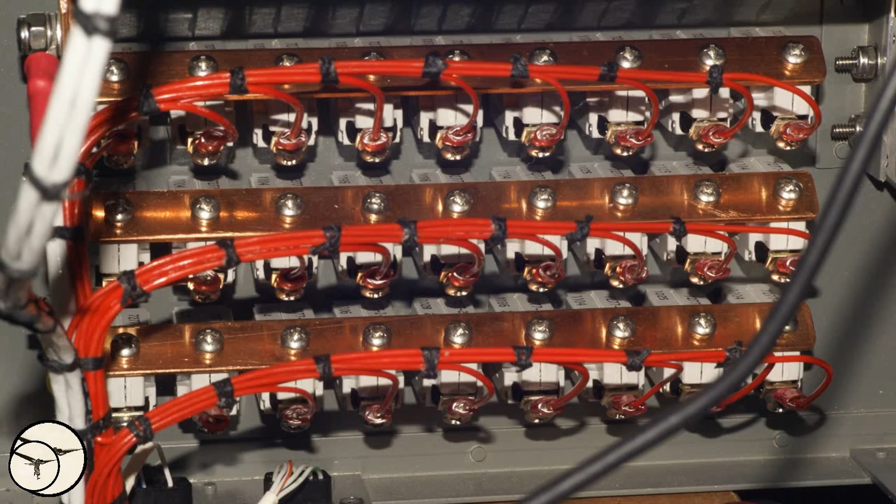The ATR features a sophisticated electrical system designed with multiple buses and alternate power sources to ensure redundancy and reliability for critical systems on board. A bus is a metal bar used to distribute electrical power to multiple systems.

At the core of the system are 6 key buses powered by 2 onboard batteries. The hot emergency battery bus, hot main battery bus, DC essential bus, DC emergency bus, DC standby bus, and via an inverter, the AC standby bus. These buses support the aircraft's most vital functions in the event both generators fail.

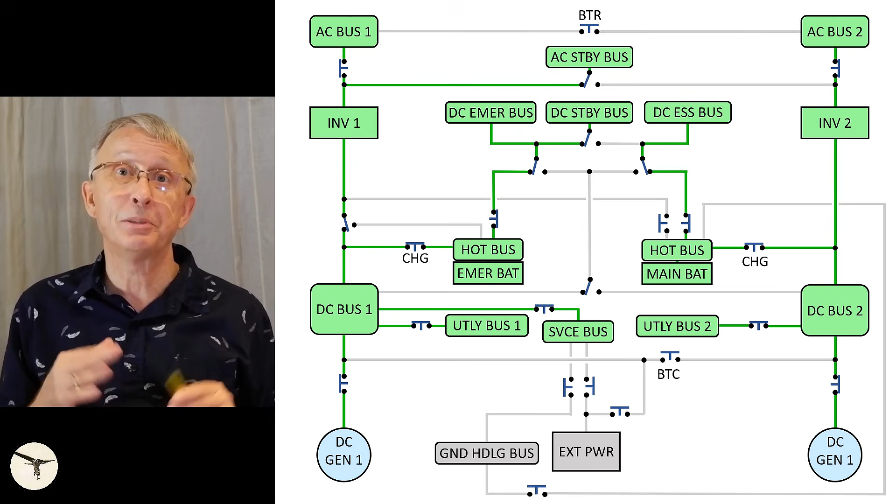The 2 DC generators not only keep the batteries charged, but also supply power to 2 primary buses, DC bus 1 and DC bus 2, which handle general electrical loads and various service functions. In addition, 2 inverters convert DC to AC power, supplying 3 AC buses with constant frequency power for systems that require alternating current. Here are some relevant systems powered by those buses.

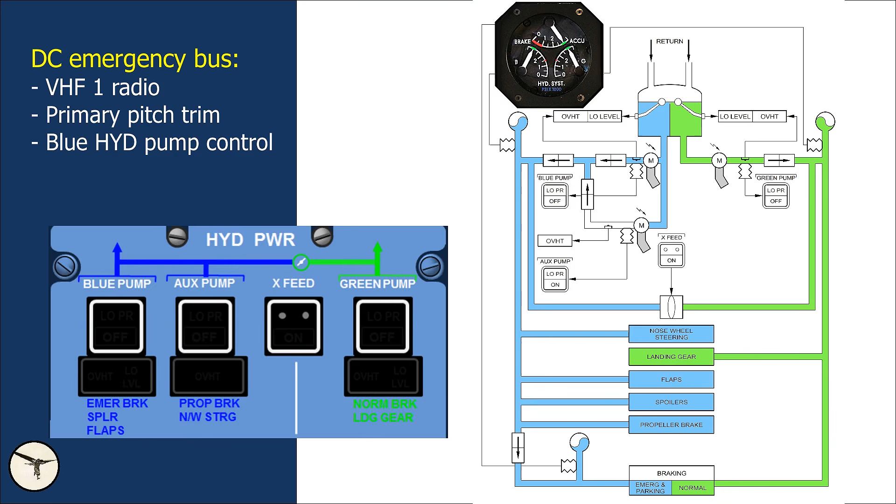DC emergency bus: VHF 1 radio, primary pitch trim, and blue hydraulic pump control. The aircraft has 2 hydraulic systems, called blue and green, and this bus provides the electrical power needed to control the blue pump. AC standby bus: flaps indicator and captain's instruments. DC standby bus: flaps control and landing gear control and primary indicator. DC essential bus: the interphone that enables communication between the pilots.

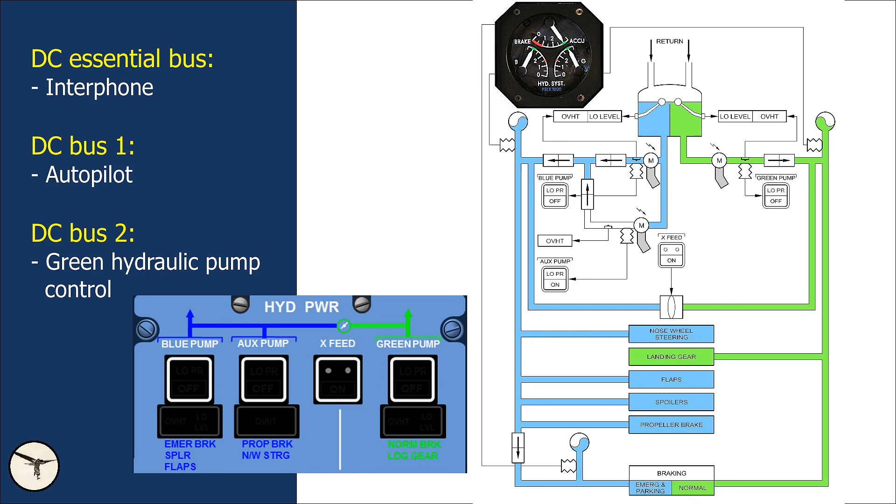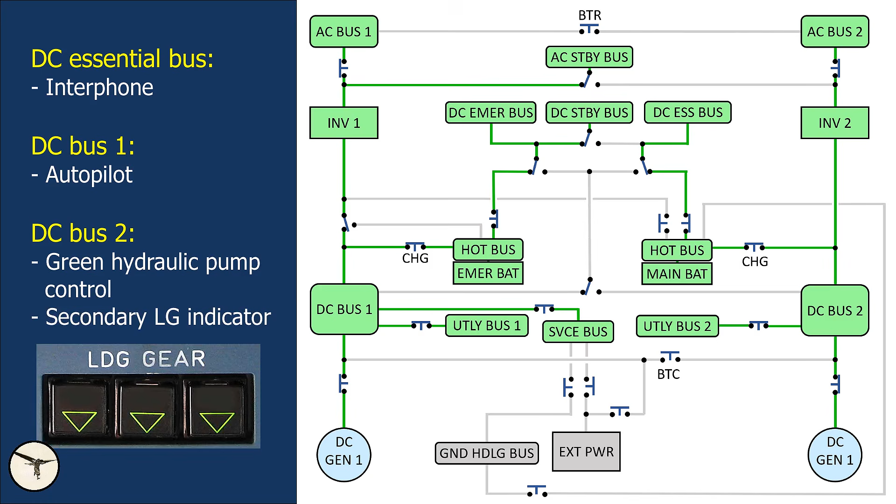DC bus 1: the autopilot. DC bus 2: green hydraulic pump control. The green hydraulic system provides landing gear retraction and extension. Remember that. DC bus 2 also powers the secondary landing gear position indicator, which also sends a signal to the crew alert system if the landing gear is not fully extended when the aircraft descends below 500 feet.

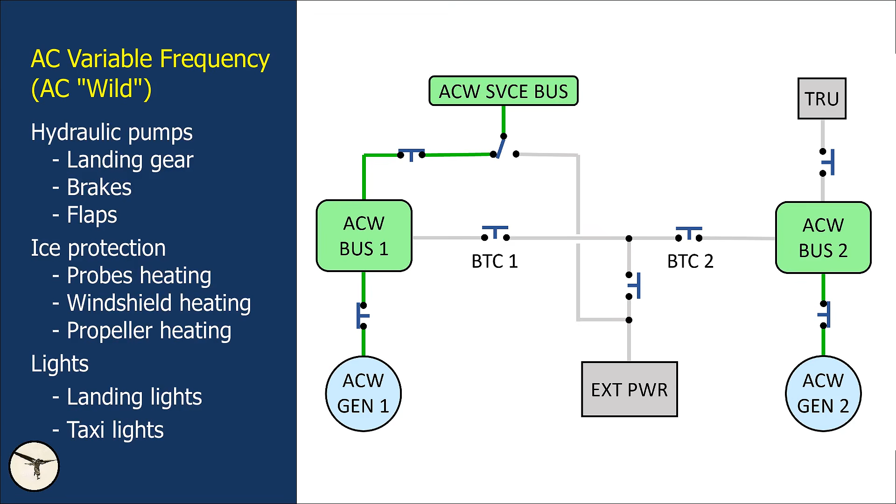In addition, the aircraft has two AC generators attached to the propellers, delivering AC electrical power with variable frequency, therefore called AC wild. Those generators supply systems needed for flight, such as the hydraulic pumps and ice protection systems.

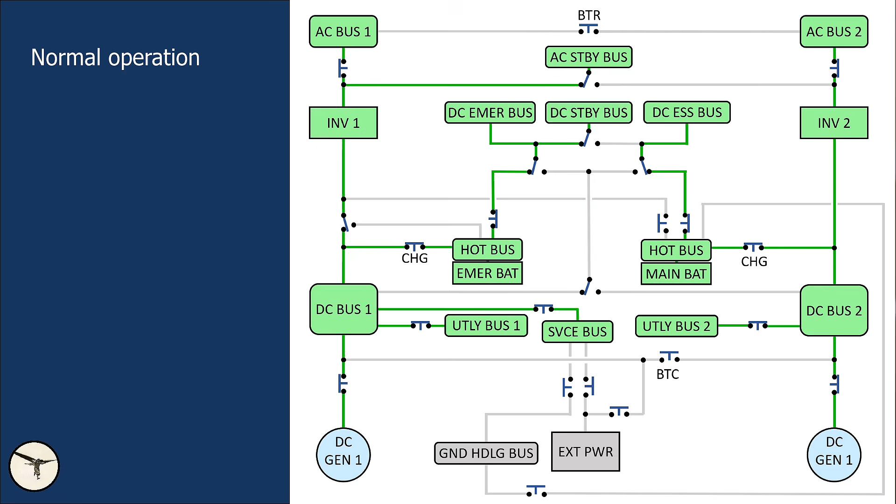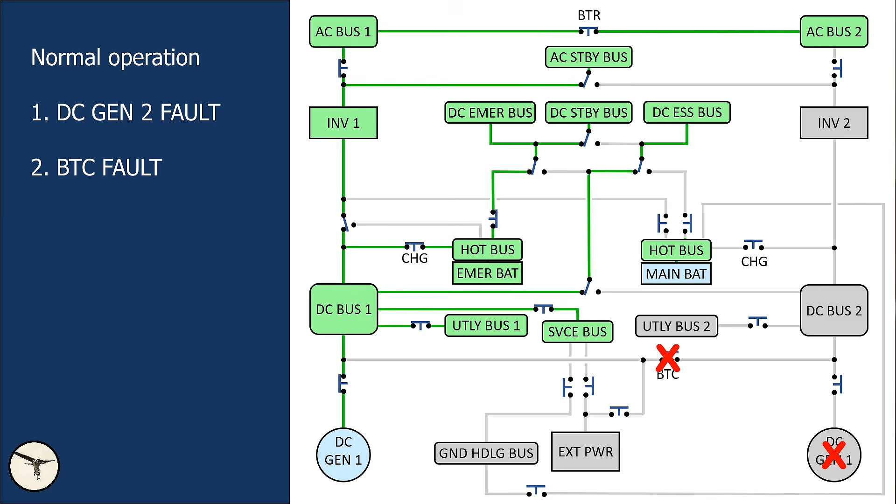Shortly after the landing gear was retracted, the aircraft suffered a series of cascading electrical failures. The initial event was the failure of DC generator number 2. In theory, the loss of one generator should not have been critical. The remaining generator is designed to power all DC buses and both inverters via the automatic closure of the bus tie contactor, BTC. However, in this case, the BTC failed to close, resulting in several key losses.

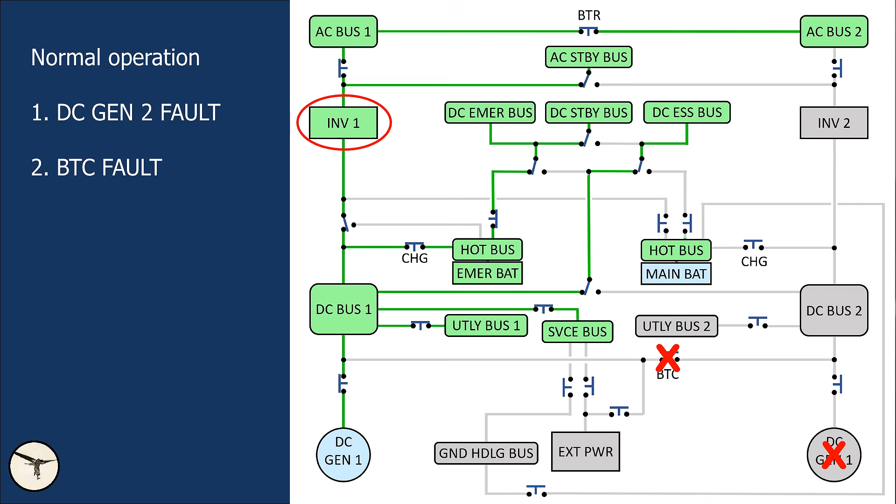The main battery stopped charging, DC bus 2 and inverter number 2 went offline. Even so, the situation was still manageable. Inverter number 1 is capable of powering all AC buses. However, it was in a poor condition. According to the accident report, inverter number 1 was able to supply the AC standby bus. However, the report did not determine whether the remaining AC buses were powered, though these buses were not critical for continued flight.

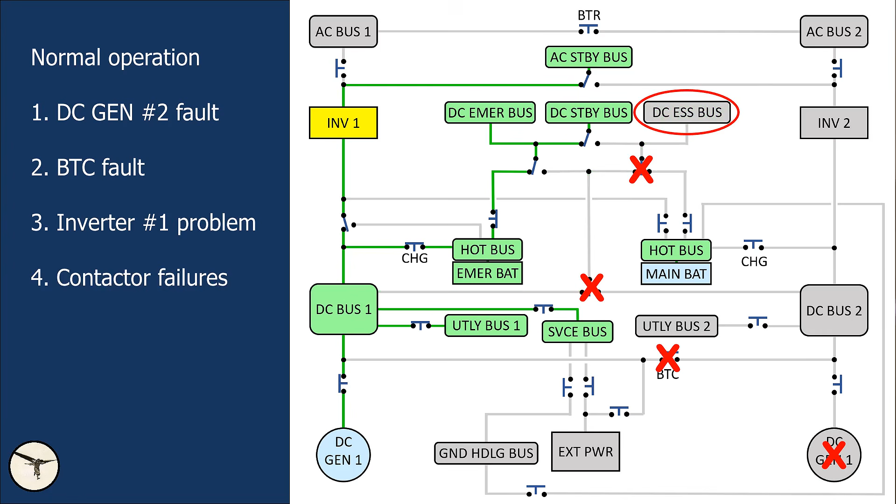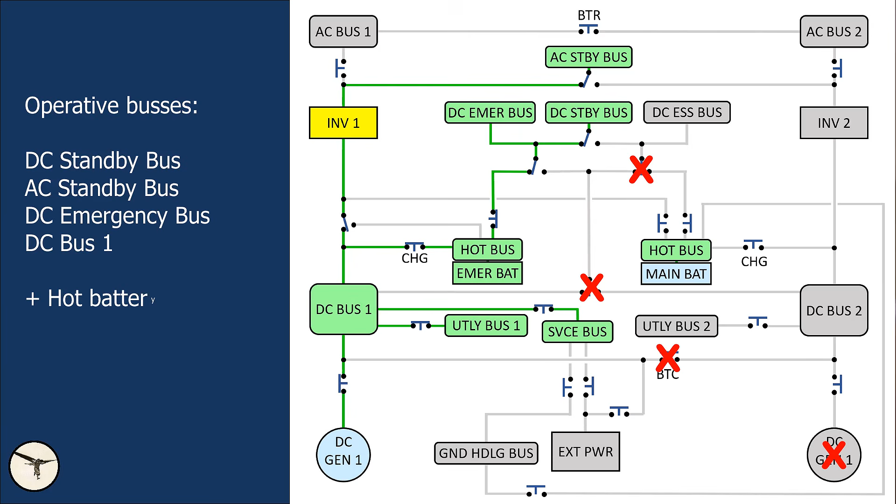As for the DC Essential bus, it has a backup supply path through DC bus 1, but that system also failed due to 2 malfunctioning contactors, leading to the loss of the DC Essential bus. At this point, the aircraft was operating with only the following buses: DC Standby Bus, AC Standby Bus, DC Emergency Bus, and DC Bus 1. This configuration provided limited functionality.

VHF radio number 1, standby instruments, and landing gear and flap control and indication were still available. Most of the systems, including various warning alerts, were lost. Despite these limitations, the remaining system should have been sufficient to complete the flight and land safely. Shortly after the generator failure, the captain asked the first officer what had happened. The first officer correctly identified the loss of the essential bus.

An important observation, as this failure results in the loss of key engine instruments: NP, propeller speed; ITT, turbine temperature; and NH, high pressure spool speed. According to the crew's testimony, the only flight instruments that remained operational were the standby airspeed indicator, standby artificial horizon, and standby altimeter. Additionally, the pitch trim was inoperative in both normal and standby modes, locked in a position consistent with takeoff.

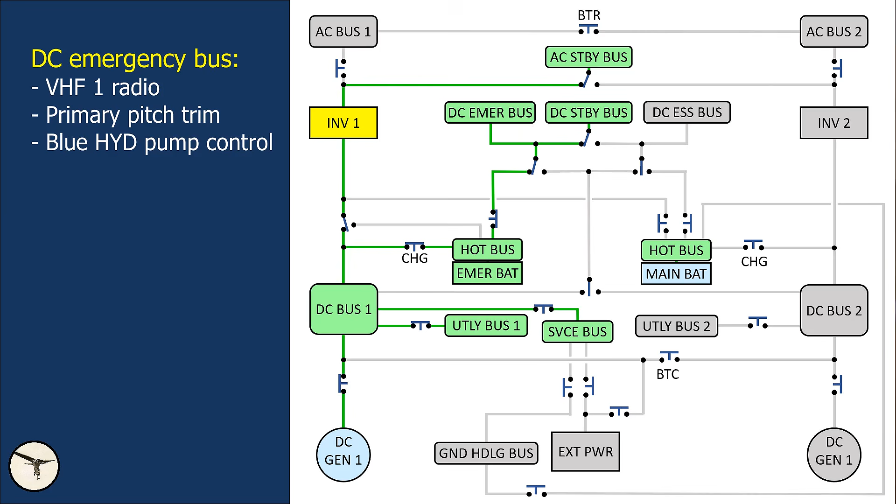However, this account doesn't align fully with the technical details seen in the report. For example, it was concluded that this emergency bus was functioning because VHF radio number 1 was operational. The same bus powers the primary pitch trim, which the crew reported was inoperative. This implies that there may have been additional undocumented failures affecting the aircraft systems. Faced with the loss of primary flight instruments, autopilot, and pitch trim, the crew decided to return to Manaus. They were flying in visual meteorological conditions, VMC, and requested a landing back to runway 11.

Given the circumstances, it's easy to imagine the surprise and startle factor the crew experienced. Wanting to return to the ground quickly was understandable, but in any emergency, no matter how stressful, it's essential to take a moment to evaluate the situation thoroughly before acting. The critical question is, do I have control of the aircraft? In this case, the answer was yes, despite the difficulty caused by the inoperative pitch trim. While physically demanding, the flight was still controllable.

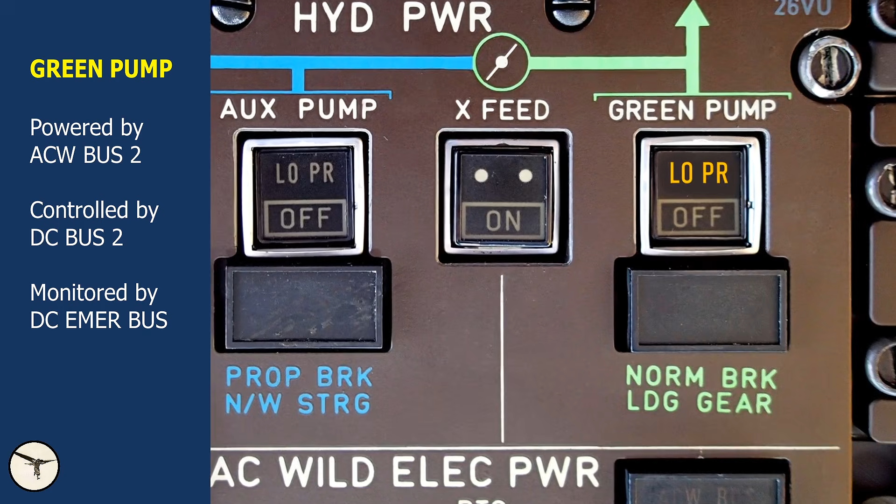Had the crew taken a bit more time to assess, they may have noticed a more serious issue. The green hydraulic pumps were no longer working. Why? Because it is controlled by DC bus 2, which had failed. And why is the green hydraulic system important? It powers the landing gear. As the aircraft approached for landing, the crew completed the before landing checklist, the only checklist used during the flight. During this checklist, the following exchange occurred.

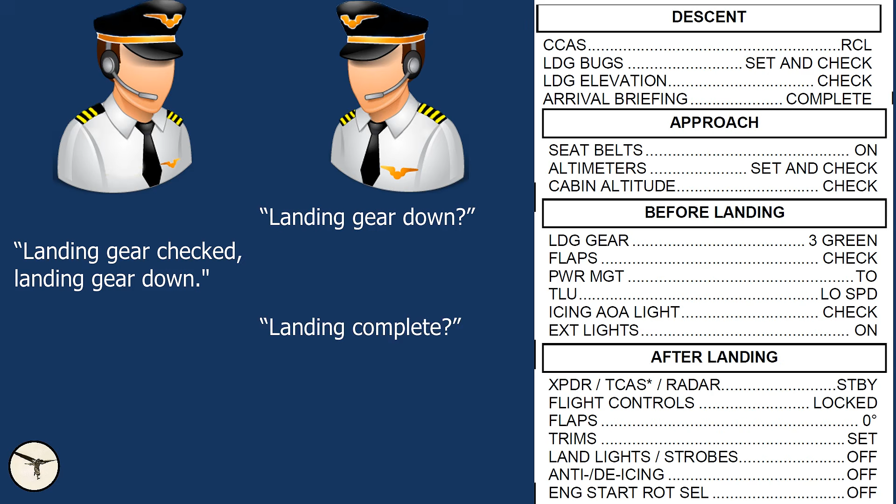Captain: landing gear down. First officer: landing gear checked, landing gear down. Later on final approach, Captain: landing complete. First officer: landing gear. Captain: down, 3 green lights. But as we know, the landing gear was not down. When questioned by investigators, both pilots claimed they saw the 3 green gear down lights illuminated.

How could this be? The most likely explanation is cognitive bias and muscle memory. In routine operations, flight crews often respond to checklist items almost automatically. It's possible the captain gave the standard response without verifying the indication, and the first officer accepted it without cross-checking. Meanwhile, the landing gear handle had been selected down, but nothing had happened. Compounding the situation, the ground proximity warning system had lost data from the secondary landing gear indicator, which was no longer powered. As a result, it couldn't issue a warning that the gear was not extended.

Just 6 minutes after takeoff, ATR 42, serial number 20, touched down smoothly on runway 11, with the landing gear still retracted. The aircraft came to a screeching stop, sustaining significant damage to the underside of the fuselage. It was subsequently written off. 2 occupants received light injuries. That dramatic end marked the conclusion of a long and faithful service life for the ATR: 33 years in the air with over 45,500 flight hours logged.

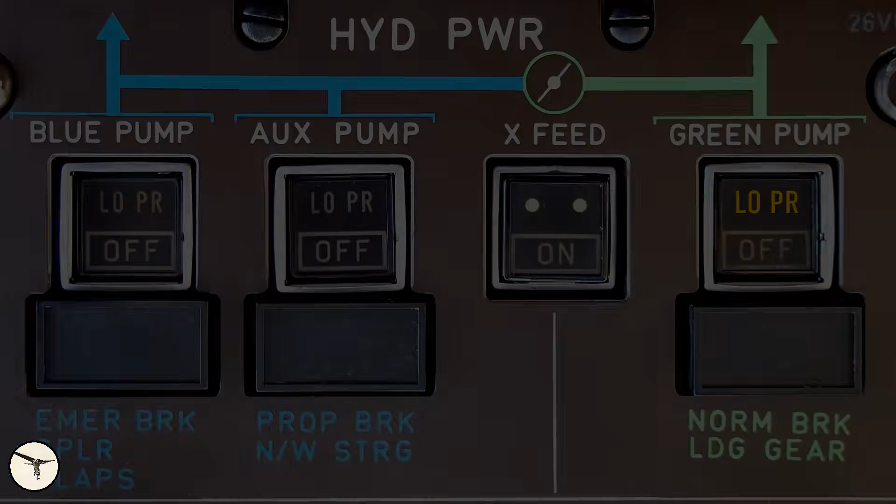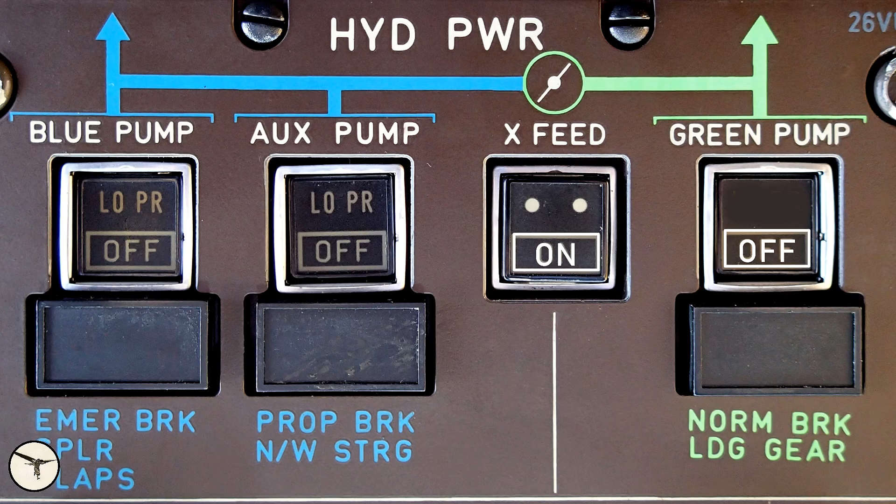Had the crew realized that the green hydraulic pump had stopped, could they have done anything? Yes, they had options. The ATR's hydraulic system includes built-in redundancy. Plan A would have been to open the hydraulic crossfeed valve, allowing the blue hydraulic pump to pressurize both systems. With pressure restored, the landing gear could have been lowered normally. If that failed, there was still a plan B, pulling the emergency landing gear handle. This would have released the gear to deploy using gravity and aerodynamic forces.

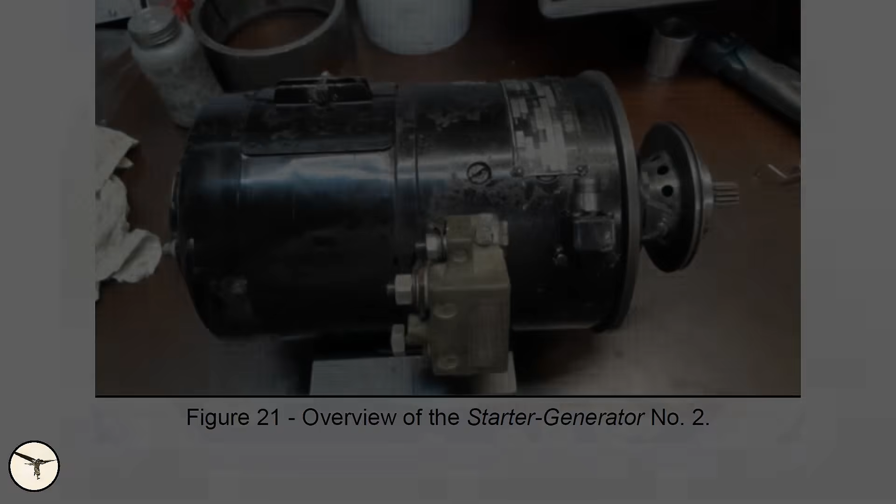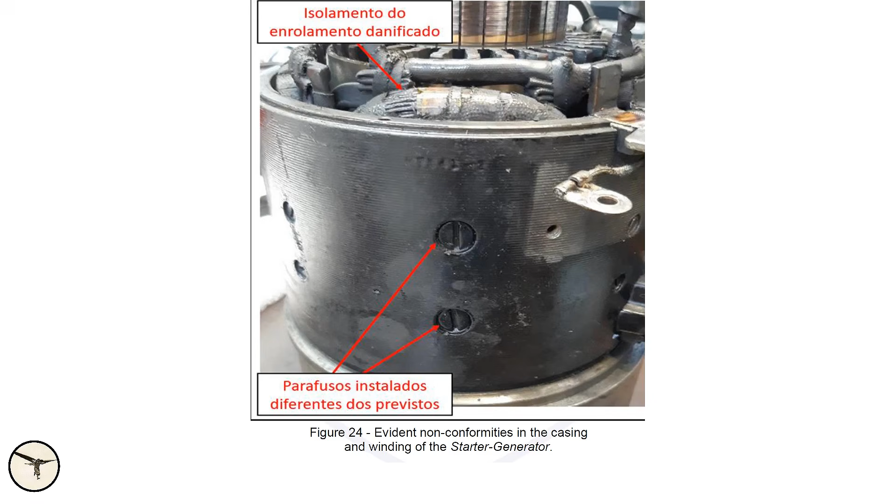Post-flight inspection of the DC generator revealed that it had not been maintained in accordance with the manufacturer's specifications. Findings included improperly assembled terminal contacts, damaged insulation, a non-approved retrofit speed sensor, excessive metallic dust inside the rotor, which was of a design not authorized by the manufacturer.

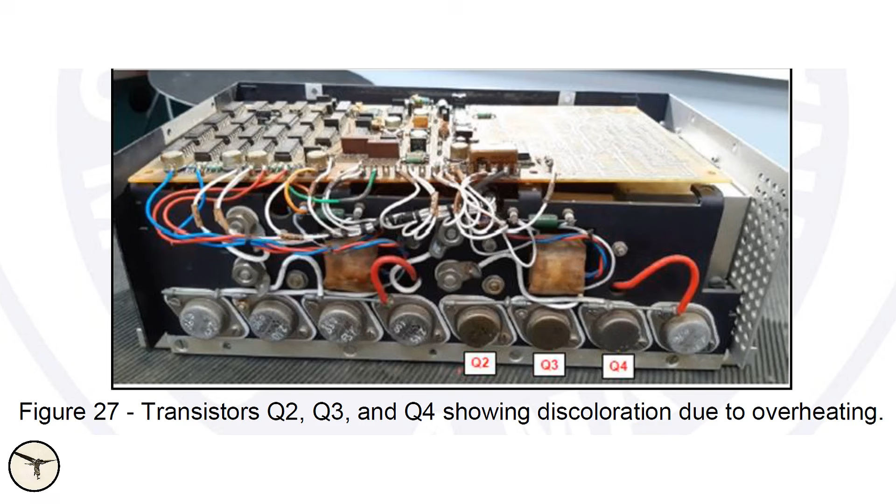Inverter number 1 was also found to be in extremely poor condition. Its output voltage was outside the acceptable tolerance range, and several components showed signs of overheating. Instead of a single 2 ohm resistor, 2 1 ohm resistors had been installed in series. Additionally, one diode related to overvoltage protection was missing, while another was short-circuited. The overvoltage and undervoltage protection settings were incorrectly configured. Despite these issues, the AC standby bus continued to operate.

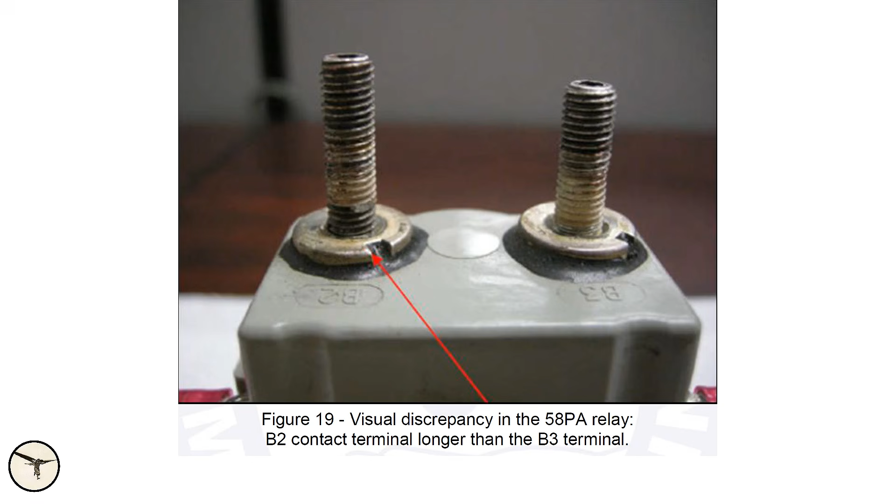The failure of the DC essential bus was traced to 2 malfunctioning contactors. In one instance, a longer terminal prevented the component from functioning correctly. All discrepancies were ultimately traced back to improper maintenance practices.

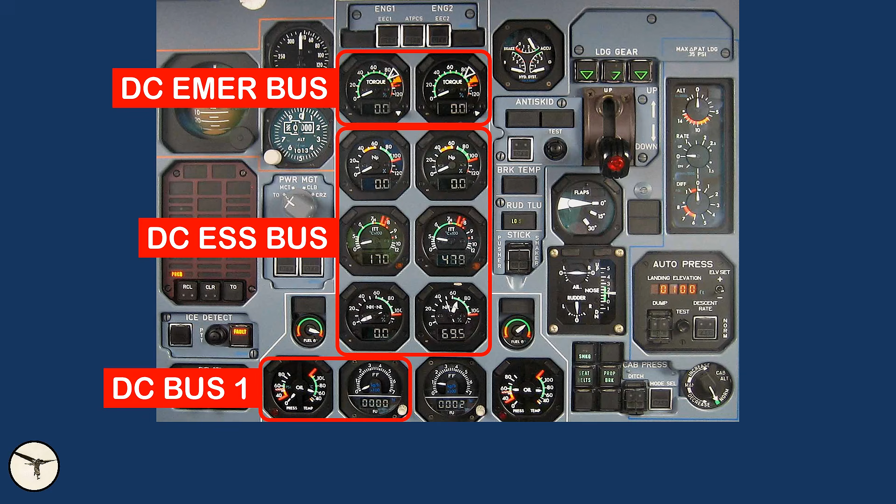Here is a simple method to identify lost DC buses in ATR aircraft with an EFIS cockpit. Check the engine instruments first. The torque indicators run on the DC emergency bus. The next 3 instruments, NP, ITT, and NH, are powered by the DC essential bus. Engine 1's oil and fuel instruments are supplied by DC bus 1. Engine 2's oil and fuel instruments are supplied by DC bus 2. Lastly, if the DC standby bus is lost, you'll see an undervoltage alert on the overhead panel.

What is the moral of this story? When the going gets tough, don't rush. Take a deep breath, lean back, and assess the situation. What's working, what's not? Communicate with your colleague. Share your observations, analyze the problem together, and agree on a plan before taking action.

In this accident, improper maintenance played a critical role. A grounded aircraft doesn't generate revenue, so it should be a top priority for company management to maintain a strong and effective maintenance organization. There are also important lessons for the training department. Most pilots can fly perfectly on autopilot when everything works as expected. But if a pilot struggles with understanding systems or emergency procedures during training, that's a warning sign.

Unfortunately, many accident reports mention poor training records, especially for captains. I have met experienced captains who don't pay much attention to how aircraft systems function, saying, "I just follow the checklist." The problem is, checklists don't cover every possible failure combination. What pilots truly need is a solid understanding of the systems and how they interact, especially the electrical system.